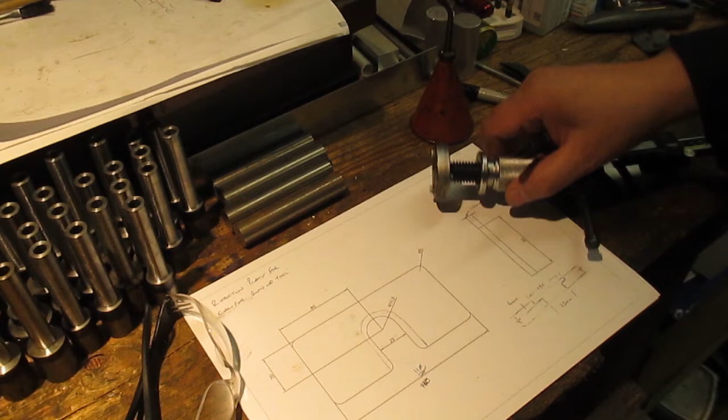Nice little project this episode. I've been asked to make what's called a reaction plate for a caliper piston return tool. So as usual I've done a little drawing, so we'll get you into the bench and we'll explain exactly what we're going to do. Okay, well, so here's my drawing.

So I originally took some dimensions of the gap in here. So as you can see, this plate has got a slot cut out which fits in here. So as it slots in there, this is then the front part of the caliper. And there's obviously the rear part where your piston would be, and then you just turn this to get your piston to return back, so you can install new brake pads.

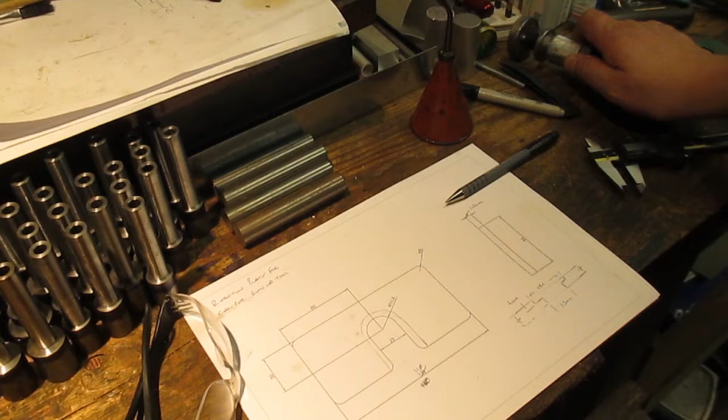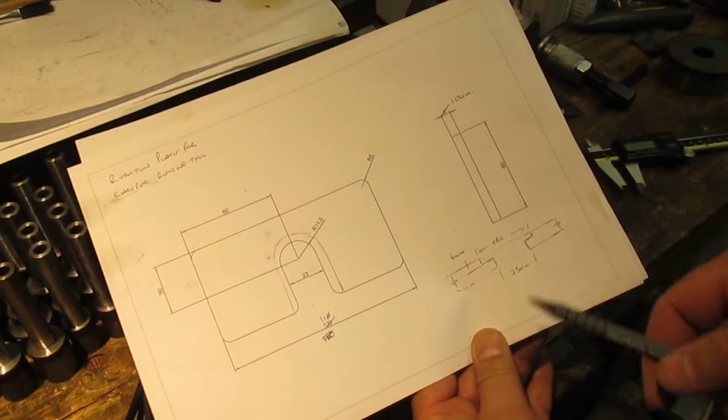So I've drawn this out and I've made a couple of amendments to it, because the original plate I believe was only 6mm thick. Now I don't have any 6mm plates, so I'm going to use a 10mm plate, and then we're going to cut an extra groove in it. So as you can see here, we've got the 10mm here. We're going to do a 4mm shoulder. We've got a 23mm slot.

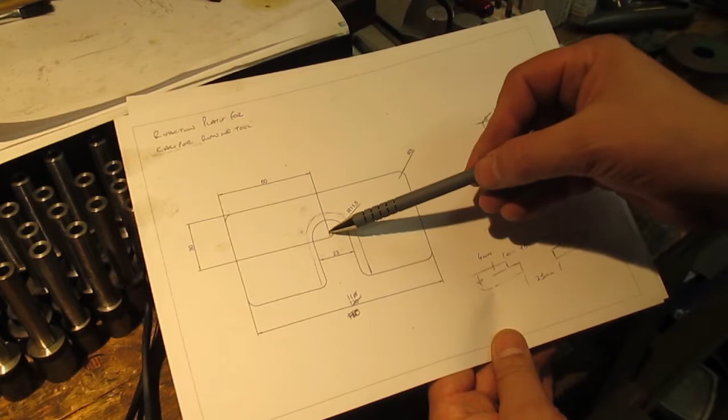So what we'll do is we'll cut this out and most probably mill it to size, dimensionally, length and width, and then we'll find the center of this hole, I should say, and then put it in the lathe.

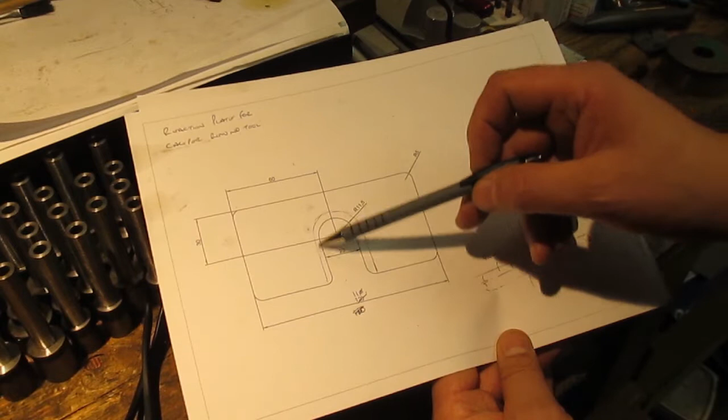We'll drill and bore the hole, and then we'll drill and bore the shoulder, and then what that'll allow me to do is then I can put it in the mill and then just literally slot this out, or I can put it in the saw or do whatever, grind this out, and then we can mill out the shoulder as such. So yeah, that's what we're going to do today. Nice easy project for me.

This was sent to me by one of my close friends. I think his father either lost or bent the plate that was there, so he can't use it anymore, so we'll make him a new one. So what I'll do is I'll find a bit of material and I'll bring you back then.

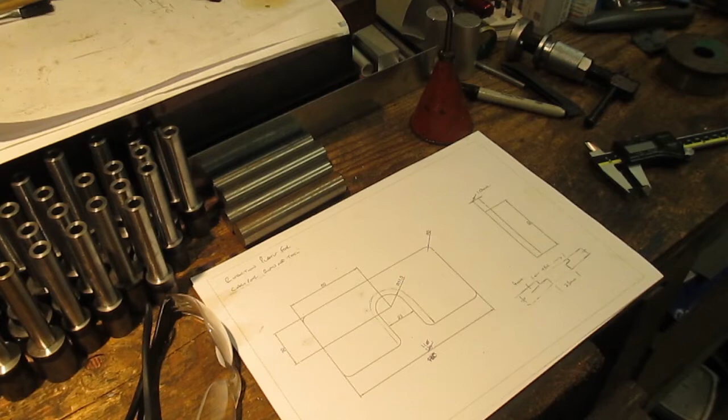So as you can see, we've got the plate set up in the mill. We're just over length. Length isn't really critical, neither is the width, to be honest, but I've got 110mm here just over, so I'm just going to mill this edge just to make it nice and square to the other two machine faces.

And then off camera I'm going to cut 20mm off of the width, because it's currently 80, I need it 60, and then we'll put it back in the mill on the long edge, and then while we're here we'll change the milling cutter out for a drill chuck and a drill bit, centre bit, and we'll find the centre of this and drill that out, just so we've got a point to use when we're in the four jaw. So yeah, let's get cracking.

Right, well, as you can see, I've dropped the table a bit. We've now got the drill chuck in and a wobbler in here, a wiggler, so we can find the centre. So we'll find the centre across here, and then we'll find the centre of this plate. I've got a half function on the DRO, so it makes it nice and easy, so it doesn't matter what size this is, I don't need to work anything out. We'll just use it until it stops spinning and kicks off, and then we'll crack on from there. So let's get it done.

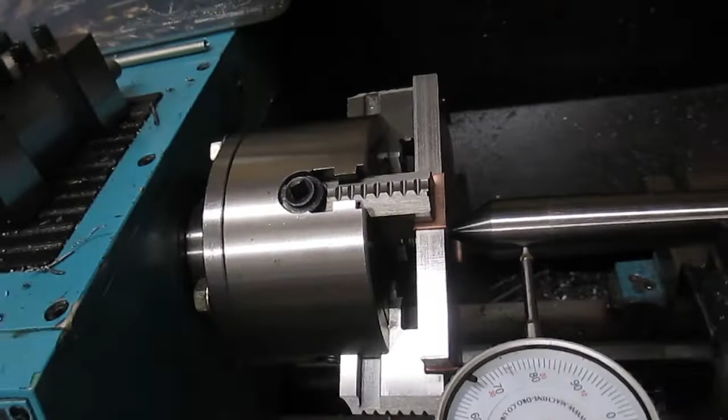Okay, well, as you can see, we've got the four jaw set up in the lathe, and what I'm using is basically two dead centres. So I've got an MT3 and MT2, and using the centre hole that we originally drilled, we can quite easily get this on centre.

So if I rotate the chuck, we can see that we're only sort of 0.01 of a millimetre out. So I think for what we're doing, that's good enough. So I'll get this all removed and we'll start drilling and boring that centre hole.

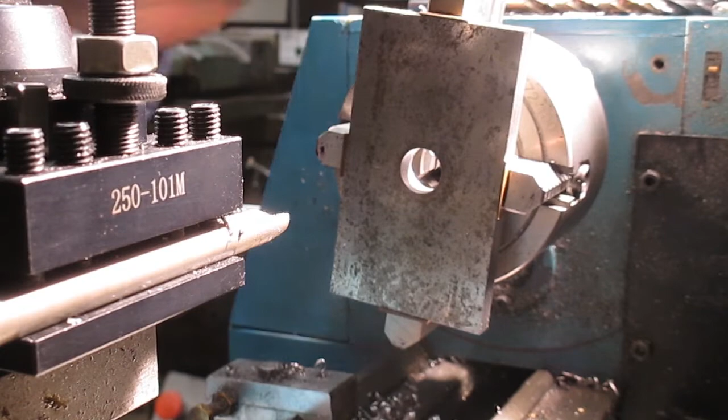Okay, so just got to take this out to 23mm and then we're good to set the shoulder.

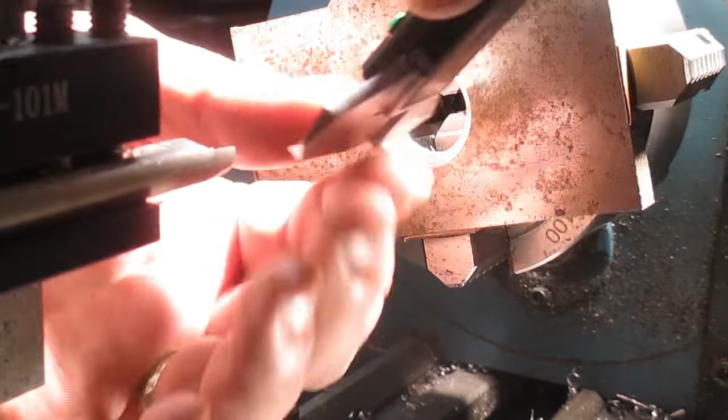Okay, so I'll quickly change the battery there, it nearly died. So we are currently at 29.2. I just want that to be 30, so again we'll just bring that out just to its nominal 30mm. 10, 20, 30, 40.

Okay, so all I need to do now is just get some lines drawn, mark this back out to cut the slot out from one side, and then we'll get back into the milling machine to do obviously this feature straight out and clean up the cut edge for the internal slot, and then it's just really just going to round the edges off and done. So I'll see you back at the milling machine.

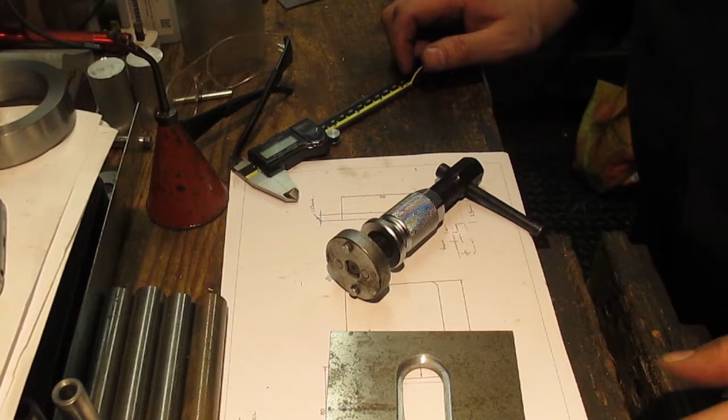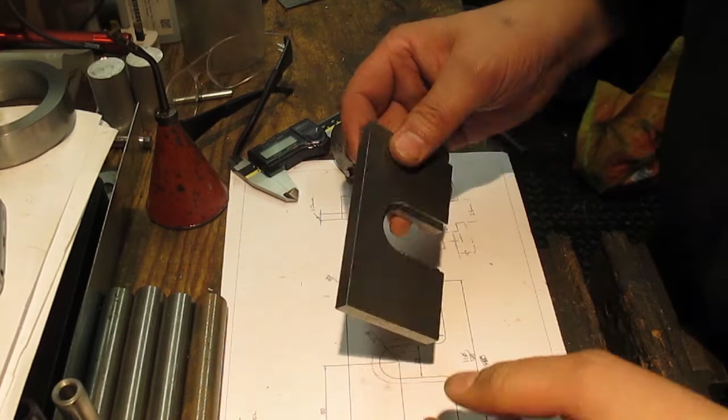Okay guys, well that's it. I was going to round the edges of this off and put a 5mm radius on them, but I've just spoken to my friend that this is for, and he's saying it's not really necessary. He just wants it back because he's got some brake pads on his car that he wants to sort out.

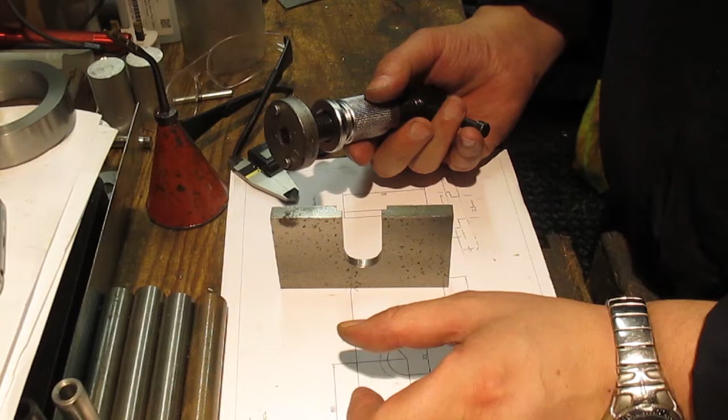So for those of you that don't know, basically the piston return tool is for use on calipers. Once you take your brake pads out, your piston that drives the brake pad against the disc is normally still out. So you put this where your outside pad is, you slip this tool in there, and then you use this to drive.

Once you've released the pressure on the actual system, you can then use this to push the piston back, fit your new brake pads, pump your pedal a couple of times so they come out to where they're meant to be. So that's all it is really. I think the actual ones you can buy with the tool are 6mm, but 10mm plate should work perfectly, and that slots in there really well.

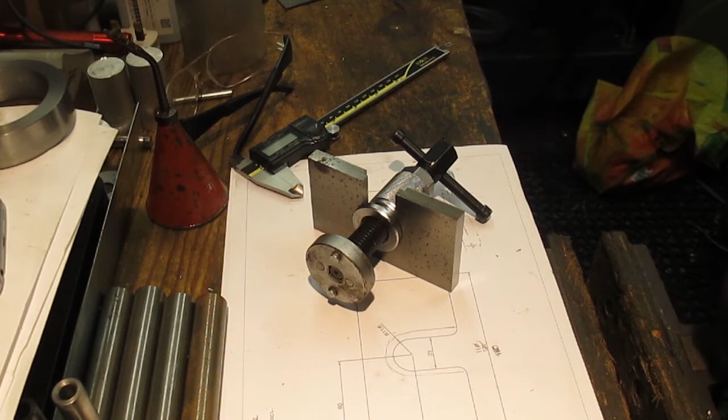So all that's left for me to do is let my friend know that it's done, and he can come and pick it up. So fantastic little project for today. All done. Well, that's the end of this week's episode. Hopefully you've enjoyed coming along for the ride to watch me make that reaction plate for that piston return tool for a friend of mine. Hopefully now he can get his brake pads done on his car.